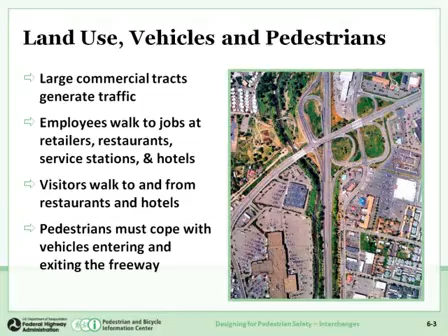Land use today has evolved significantly since World War II. We do not have the compact urban centers that we once had at the time of World War I and before. Typically, along a freeway, a typical city has just a few freeway interchanges. And the freeway itself becomes a barrier to pedestrian movements.

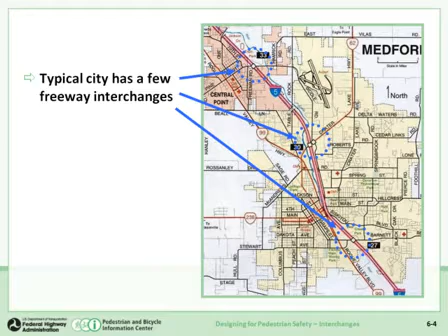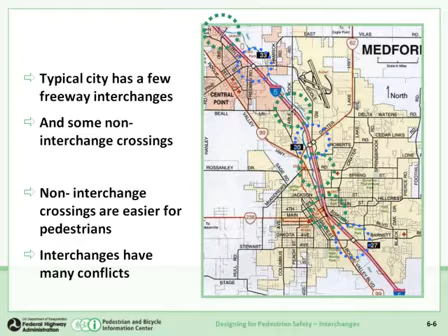We have some crossings that are not interchanges. These are preferable from a pedestrian's point of view because they don't have the ramps. We have non-interchange crossings that are easier for pedestrians. It's the interchanges that have the conflicts.

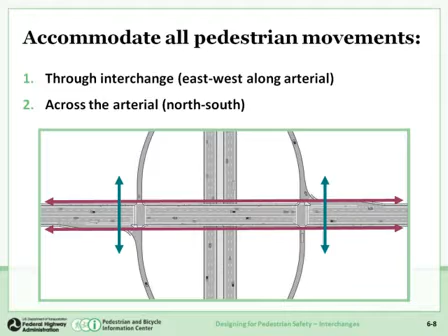And sometimes, and not all that uncommon, we need to be able to get pedestrians across the arterial near the freeway ramps. And usually there are added turning lanes, either exiting decel lanes or accel lanes, that add further width and make it more difficult in terms of the distance crossed for a pedestrian.

The interior crosswalks at an interchange, those that are between the ramps on the conventional roadway, typically are closed. The crosswalks that are on the outside of these ramp intersections typically are the ones that need to be open. And yet, even with islands and other good measures and tight radii, this is not a favorable, conducive, walkable environment. This is one that's got a higher level of difficulty to it for a pedestrian.

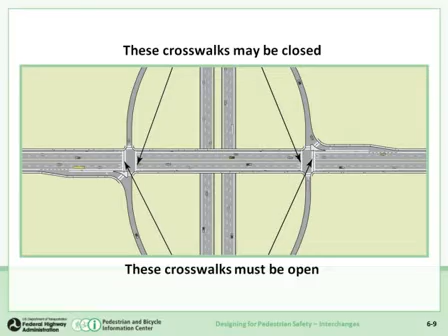Typical interchanges can be big with large turning radii. The key, the best practice to accommodate pedestrians, is to bring the speed environment of the turning movements at these ramp termini with the conventional roadway down to a pedestrian level, a context that we'll characterize as lower speed. And one of the outcomes of that is the interchange then begins to look like an intersection.

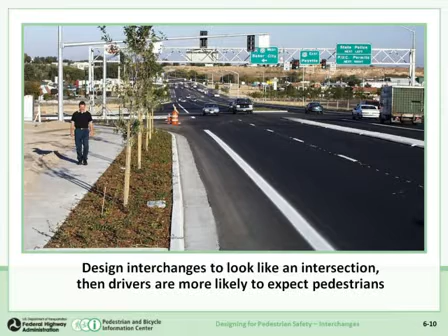And it's an intersection where drivers would expect pedestrians, at a busy intersection like in the photo that you have in this slide. Radii are kept reasonably small to restrict the speed of turning traffic and hence make it workable for pedestrians. Consider each ramp terminus as half of an urban intersection and plan and design it within that context.

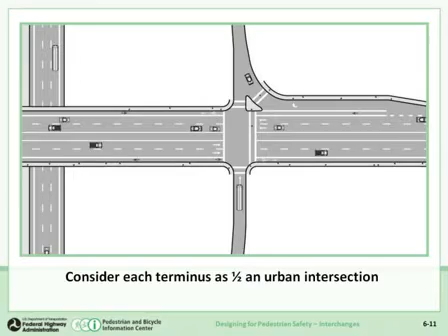Islands are the engineer's best tool for busy intersections with lots of lanes to reduce the crossing distance exposure for a pedestrian, to greatly reduce the time they're in the street and the distance.

What you wish to avoid are the large radii, such as the intersection to the right. This is a real-world photo from North Carolina of an intersection that was developed as a rural interchange with a high-speed sweeping right turn lane. Avoid a free flow movement. How do pedestrians get across it, as shown with the purple arrow here?

It's a context that's high speed. A large radius means high speed, and this is not a context that we want to be able to cross pedestrians in. The best practice is a tight radius: restrict speeds, keep them to a slow environment, and facilitate the movements of the pedestrians.

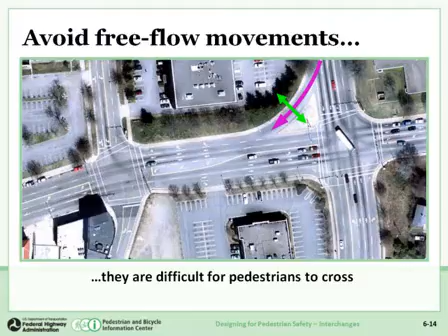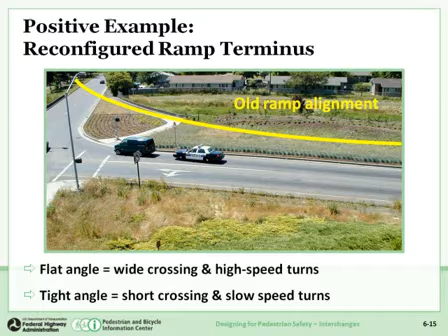The older ramp alignment is shown in yellow, and you can see how the new ramp alignment, which is tighter, has been brought in, and you can see where the sidewalk is turned in this photo from Oregon to the crosswalk. Why was this done? To facilitate, in an appropriate manner within the appropriate context, a pedestrian-friendly environment, one that works for them even though it involves high-speed exiting traffic from the freeway.

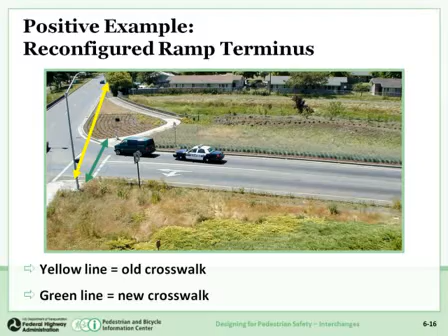The yellow line is where the old crosswalk was, and look at the length of that. The short new crosswalk is shown by the green arrows, and that is a significantly smaller distance, less exposure in the street, and the speeds of the turning traffic exiting the ramp will be much smaller.

Where free flow ramps are used, that's the least desirable; crosswalks should be placed where they're visible. The existing crosswalk had been up on the ramp itself, where it's very hard for an approaching driver on the crossroad to see. The crosswalk could be here, as shown with the yellow arrow, and that location is better seen by the approaching driver, and being seen as a pedestrian is very important.

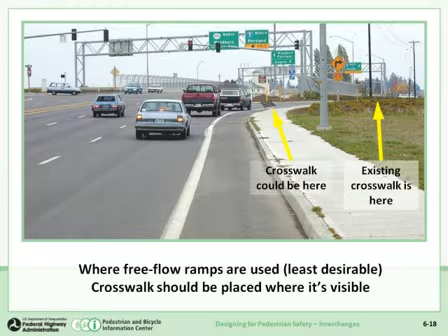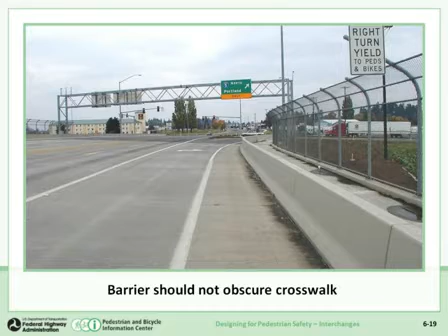Barrier, particularly the raised Jersey barrier, and particularly a problem with the single-point urban interchanges, can obscure the crosswalk. Be very careful of sight lines and what a driver can see and where. This is a check that should be done in terms of the availability of sight of the crosswalk for each urban interchange.

Choosing the best crosswalk location sometimes is not clear, and you need to make it what's most logical to the driver or to the pedestrian. You have three choices: the most direct route, and that's usually on the direct accessible path; the shortest crosswalk, which rarely tends physically to be the most direct route; and then there's the compromise somewhere in between to attain visibility of the pedestrian in the crosswalk and still be not the shortest, but at least shorter than the one that would be on the most direct route.

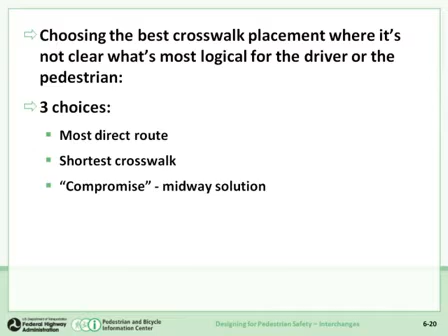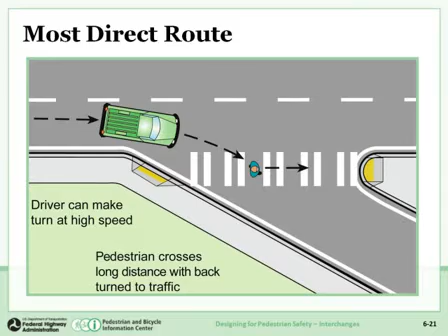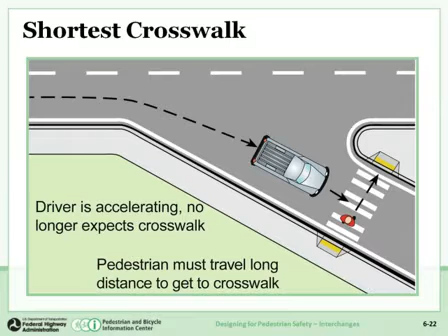The most direct route always ends up with a longer crosswalk. Unfortunately, the driver can make a turn like this at high speed, and the pedestrian's out in the crosswalk area for a long time and distance with his back turned to traffic. If you shorten up the crosswalk so it's straight across, the driver cannot see the pedestrian in the crosswalk and the sight line on the approach, and they turn onto the ramp and accelerate, and there's the pedestrian confronting them. Even though this is the shortest crosswalk, it's not the best.

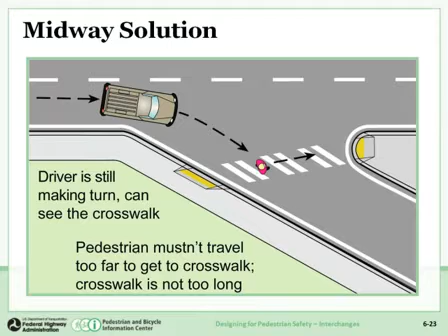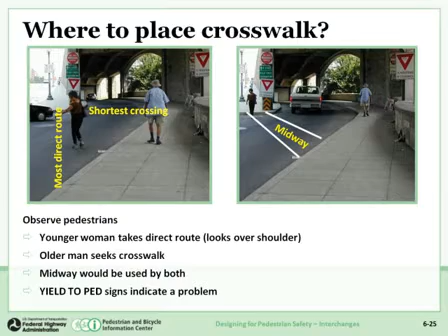So midway could be used by both a younger person or an older person as a choice. And midway in between seems to work the best. And that is what we, FHWA, are recommending as the best practice. And it's given the best results in the field.

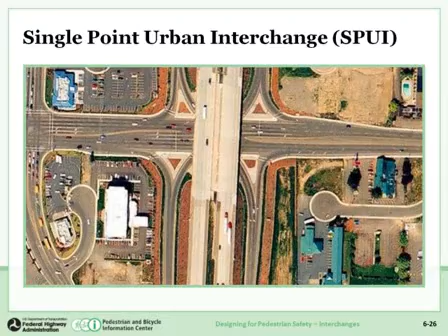The single-point urban interchange, or SPUI, presents several problems, particularly the SPUI that's under, and this is a photo of a freeway going over a single point that goes under below. When you look at all of the locations where a pedestrian has to cross, there's many, and that's the problem. We know that a single point takes less right-of-way than a split diamond or a tight diamond. Also, as a result, it is always seen as advantageous in terms of cost of land.

Also, with a SPUI, we only have 3 phases that we need for the signal control. We have 3 movements. They're all run through one cabinet, one controller, one set of signals. We first have the through movements on the crossroad. Then we have the left turns in one direction. Then we have the left turns in the other direction. With having only 3 phases as opposed to a tight diamond with 6 phases, we have less yellow and red time, less lost time as it's spoken, and more efficiency.

We have longer clearance distances with a single point, and we have a lot of ramps. In fact, each of the crosswalks that go from left to right have to cross 1, 2, 3, 4 on and off ramps in total in order to continue along their path along the arterial.

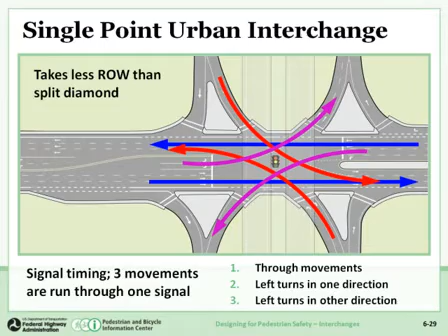So how to make a SPUI work for pedestrians? Provide continuous sidewalks on both sides. Break up the crossing into several small steps, and it's done naturally in a SPUI design with the geometrics to provide the large turning islands. These are not small. We want, with these islands, to still keep tight, essentially right angle turning movements.

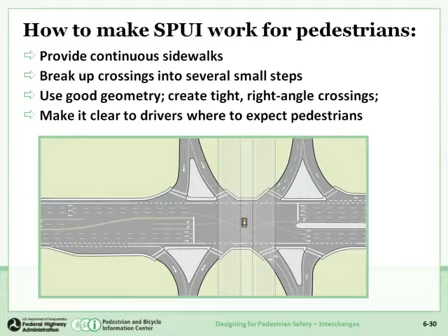Make it clear to drivers where to expect pedestrians by where we place the crosswalk, in clear visibility of the driver approaching the on-ramp. So 1, our pedestrian walks along a well-defined right turn lane, crosses at point 2 to the island, crosses the on-ramp. 3, peds proceed across the island, along the sidewalk on the island. 4, then we cross the other on-ramp from the left turn, and that's signal controlled.

Then our ped proceeds on the sidewalk under or over the bridge to the next set of ramps for the other side of the freeway, and cross the exit lane, signal controlled typically with a SPUI, cross the island, and then 8 across the last of the exit ramps, typically stop controlled. So we've broken up this sequential movement into 8 separate movements with appropriate pedestrian facilities and control for each of them.

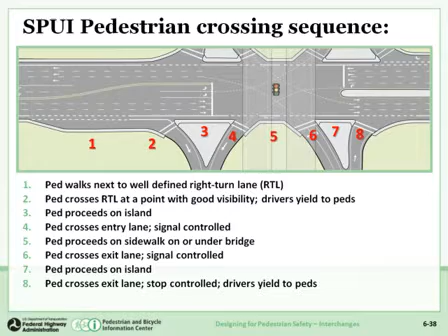So aerial view looks like this. Our pedestrians are walking from left to right. They've come up from the left on the south side of our conventional roadway for this SPUI that's under, crossed the on-ramp from the right turn lane to the island, and now cross to under the freeway, cross the off-ramp, signal controlled, then cross the second island and the yield controlled or stop controlled right turn lane, and on along the sidewalk.

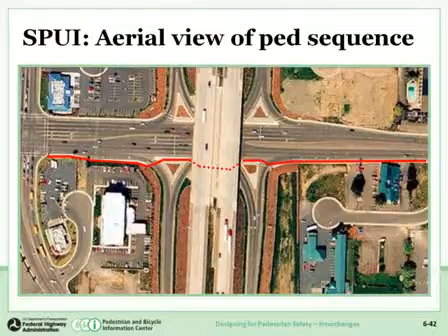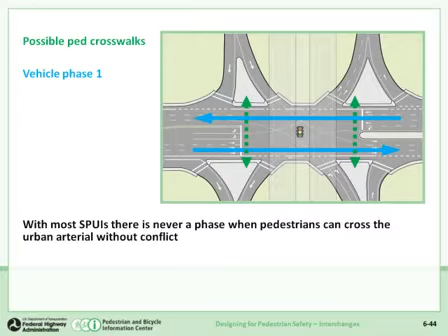With most SPUIs, there's never a phase where pedestrians can cross the urban arterial itself within the SPUI intersection. And you need to understand that if for some reason you do need to provide pedestrian crosswalks, they can be done, but you're going to have to accommodate it in the signal cycle and in the sequence. The problem is vehicle phase 1 conflicts with these pedestrian movements across the arterial at the SPUI. So does vehicle phase 2 of the 3 phases, and also vehicle phase 3.

Solution number 1 is to do a 2-step crossing, and that's where you would cross from the island to a refuge island in the middle, where they divide the 2 opposing directions of traffic, or cross the pedestrians nearby but not at the SPUI, at the adjacent signals or at a signalized pedestrian crossing away from the SPUI.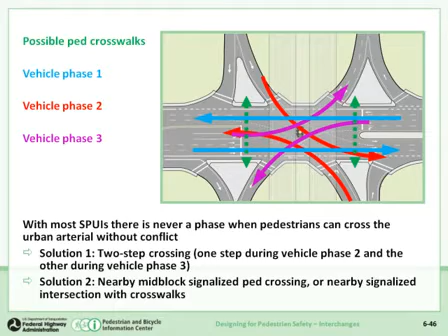So let's recap. Why is controlling land use important? Why do pedestrian crashes occur at freeway interchanges, and what kind of movements should be avoided? And how can one mitigate for these problems? Well, land use is important because you have high cost, high density, high commercial value land. And those types of land uses generate pedestrian traffic. It's expected, it's a natural outcome, and you need to plan for it and make sure it works.

Many of the employees, particularly of service sites such as large auto dealers, hotels, restaurants, walking is part of their transportation trip along with other forms of transit, and it may not be by auto at all. So provision of pedestrian facilities is crucial to get these people to work and from work safely using their mode, which is public transportation and walking.

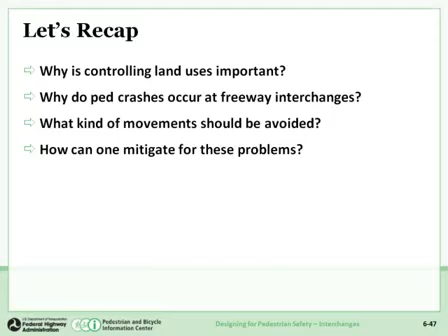The issue with pedestrian safety at interchanges is that drivers don't expect them. Drivers are exiting or entering the freeway, which is a high-speed environment, and they just don't expect pedestrians in the high-speed environment. So what kind of movement should be avoided? Free-flow movements on the ramps, anything with high speed. The best geometric design techniques keep turning lane geometry tight and stay in a low-speed context so we can provide for pedestrians. And we mitigate them with the measures I just covered.

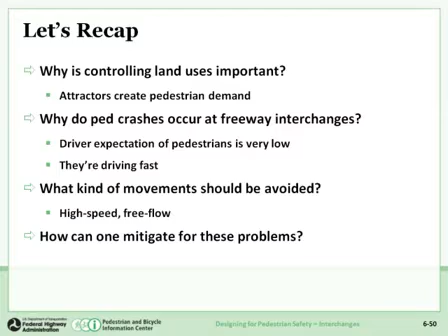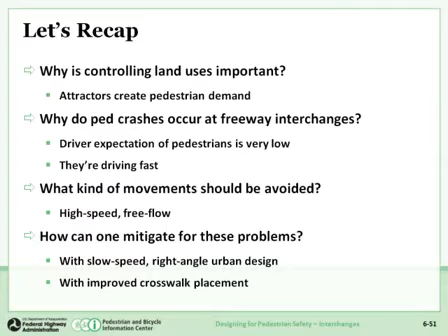So attractors create pedestrian demand. Drivers' expectations of pedestrians is low at ramp termini, and they're going very fast, exiting and entering the freeway. Avoid the high-speed, free-flow turning movements. Reconstruction or initial construction of tighter radii will create a low-speed context appropriate for providing for pedestrians. So how can one mitigate? With low speed, right-angle urban design, improved crosswalk placement. These techniques are proven. These techniques work, and FHWA is promoting these as the best practice to meet the pedestrians in the environment of freeway interchanges.

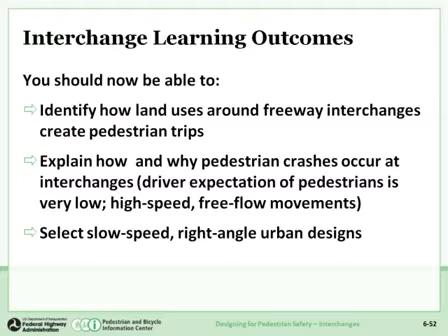So in our learning outcomes, you should be able now to identify and understand how the higher type developed land uses around a freeway interchange create pedestrian trips, and if we have pedestrians, we need to provide for them. Explain how and why pedestrian crashes occur at interchanges. Well, it's a high speed. Did I mention high speed? It's a high speed and often a free flow context, and it's one where drivers are not looking for pedestrians as they would at an urban, tight, compact intersection in a higher density area. The best solution is to stay within the pedestrian context of low speed, tight turning radii in the geometrics.

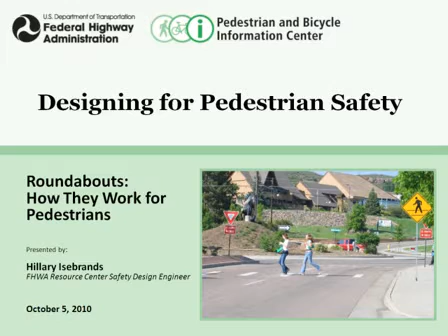So with that, I'm going to go ahead and spend some time talking to you about roundabouts. Roundabouts is an area that for the past 7 years I have done quite a bit of research on, and hopefully you'll find this information useful. Roundabouts are new and exciting. Some states are much farther ahead than others when it comes to roundabouts, but a common concern that we hear all over the U.S. is how do they work for pedestrians, and how can we make sure that pedestrians are just as safe at roundabouts as we're finding that motor vehicles are.

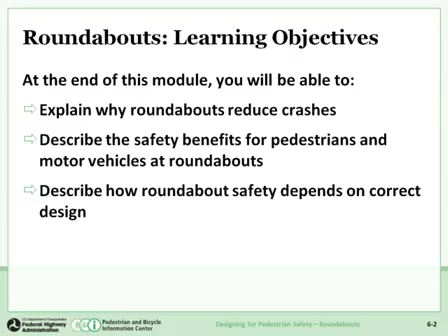So with that, the learning objectives of this portion of the webinar today are explaining why roundabouts reduce crashes and describing their safety benefits for pedestrians as well as motor vehicles, and then describing how the safety does depend on good design and good geometrics. Always important to have a good design on the ground, promoting the best safety for motor vehicles as well as for pedestrians and bicyclists.

So quickly, just going to talk a little bit about what a modern roundabout is. It is a circular intersection. There are other circular intersections that you might be familiar with, large rotaries. Also neighborhood traffic calming circles. But these are all circular intersections. But what's important to understand is that not all circular intersections are roundabouts. Roundabouts do have their own specific design characteristics, and we'll go ahead and talk a little bit about that.

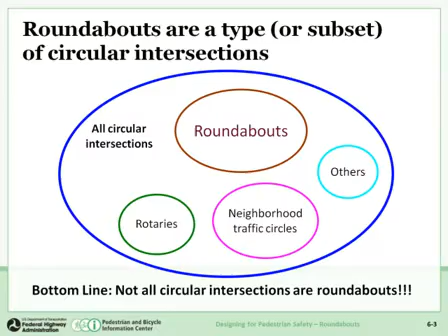But first off, we're going to look at what are some of these features of a modern roundabout that make it special and not a traffic circle and not a neighborhood traffic calming circle. So there's the separated sidewalks that direct the peds. Pedestrians do not cross to the center island. There's a splitter island that acts as a refuge as pedestrians cross one direction of traffic at a time.

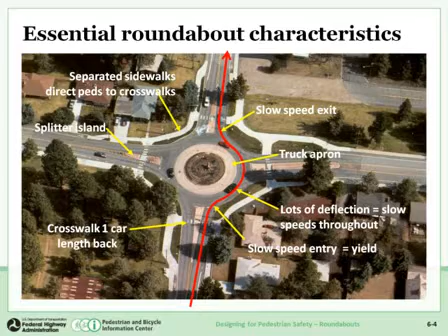Typically, the pedestrian crosswalk is approximately 1 car length back from the yield line, and also the deflection of the entry, as well as the curvature of the roundabout itself, really forces traffic to be traveling anywhere probably from 15 to 20 miles an hour. So you've got slow speeds on all of your approaches. All of your traffic is going at a fairly uniform speed, which is a safety benefit to all users of the roadway and intersection.

So that gives you an idea of some of the features of a modern roundabout, but let's quickly go back and talk about what you may be more familiar with, which might be the New England-style rotary, where we typically have a large diameter, and these large diameters can create high speeds.

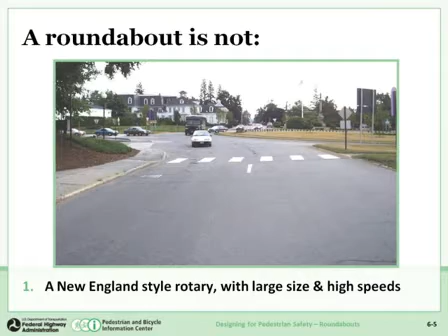So a modern roundabout is not a New England-style rotary. Here's an example; you see the large diameter. This was an old rotary, over 600 feet. There's no control on the entry, so the vehicles approaching the intersection are not yielding to the people that are driving in the circulating roadway. And so there's high speeds and weaving areas. So that's typically what you would find with a large rotary.

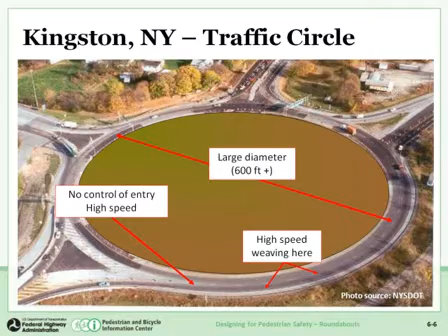Now, in comparison, look at the difference between a modern roundabout, which in this case we were saying is typically 120 to 250 feet. They can be larger, they can be smaller, but look at the huge difference between what the old style rotaries look like and what that new modern roundabout looks like. It's quite substantial, and you can see that the design exhibits slower speeds for the motorist. You can also see there is a bypass lane that was created for this particular roundabout that's fairly unique, I guess, to this particular case based on traffic volumes. But again, you can see the curvature of the approach, the deflection that would constitute slower speeds.

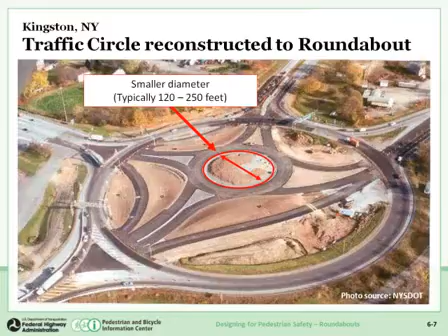Again, a roundabout is not what we find in Washington, D.C. Many of those old circles in the Washington, D.C. area actually have the green, yellow, red traffic signals that do control the vehicles coming in and out of the circle. You can also see that there's access to the center island. Again, not a characteristic of a modern roundabout, but what you would find at these DC-style circles, and I say DC just as an example.

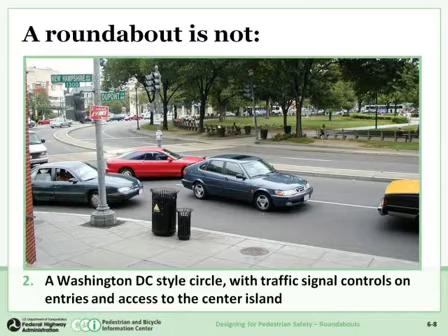Also, it's not a traffic calming circle. This is one that you often find in neighborhoods, done, again, to slow traffic down. They are constructed within the right-of-way, and again, it's not to be confused with mini roundabouts that do have the features and characteristics of the modern roundabout. In this case, there is no deflection on the approaches, and oftentimes you would find a stop sign at one or more of the approaches on a neighborhood traffic calming circle. So similar in nature, but again, not what we would constitute as a modern roundabout.

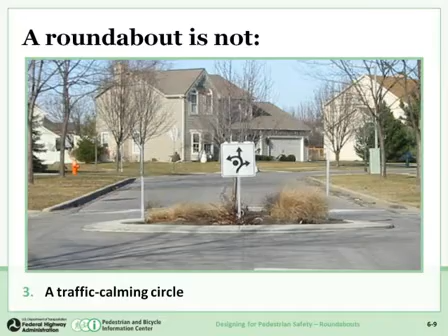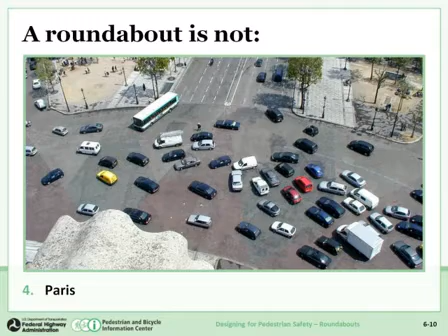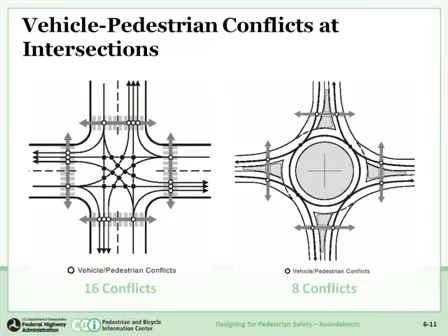Why roundabouts are safer. I've alluded to this previously, but let's talk in a little more detail. Slow speeds for all traffic; it's a key element to the safety benefits of a modern roundabout. Reduced conflicts: as we just saw, the number of conflict points is reduced. In addition, the conflict points are changed. You've got different types of conflicts. At a roundabout, we don't see T-bone crashes anymore. So we're changing the characteristics and the types of crashes that might be occurring at an intersection when a roundabout is in place compared to a stop-controlled or a signalized intersection.

And again, I mentioned another of the characteristics was the yield on entry. All vehicles approaching that circular roadway are yielding to the traffic within the circulatory roadway. Of course, if there's not a vehicle within the circulatory roadway, they can proceed through the intersection, and take an acceptable gap if there is a vehicle in the roadway.

Looking at crash reduction factors, in the U.S., there's NCHRP Report 572, which is the most comprehensive study that we have here in the U.S. regarding roundabouts. It saw the benefits of about a 54% reduction in total crashes, a 76% reduction in fatal and serious injury crashes, and it did find a 27% reduction in pedestrian crashes. Now, most of the research that has been done thus far in the U.S.

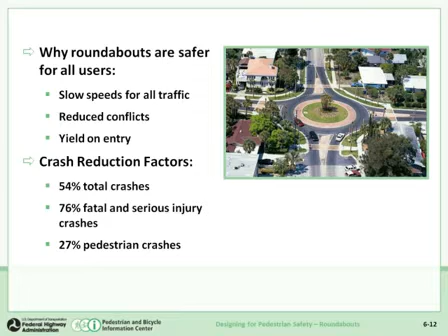However, again, going back to why roundabouts are safer, looking at the slower speeds, the reduced conflict points, yield on entry, and some other pedestrian characteristics that we're going to look at in just a minute, you can see that we do feel that there are great benefits for roundabouts for pedestrians, whether it's a single-lane roundabout or a multi-lane roundabout. But it's hard to put numbers as far as a crash reduction factor to this point, specifically with multi-lane roundabouts.

So pedestrian movements at a roundabout, again, pretty straightforward. The person crossing here from the right of the screen to the left of the screen would look for traffic coming towards that individual. When he sees an acceptable gap, he crosses to the splitter island. Again, you're only crossing one direction at a time. The crossing distance is shorter. The pedestrian might find refuge within the splitter island before then finding an acceptable gap to cross the exit side of that approach.

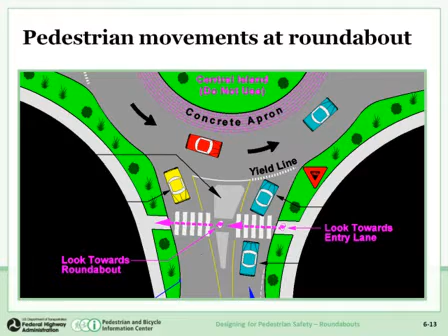Advantages for pedestrians: they're crossing only one direction at a time, which again is critical as far as choosing a gap and not looking both directions at the same time, as we sometimes have to at other types of controlled intersections, signals, and stop controlled. Splitter island, again, provides refuge, shortens the travel distance, and then reduced vehicle speeds. Again, I'm repeating this because it's so critical. These are the elements that really provide a safe environment for pedestrians at roundabouts.

And the photos that you see in this particular slide, we do find roundabouts very commonly near schools, near school campuses, all over the U.S. There are probably upwards of 50 to 100 roundabouts, I would say, near or at schools or intersections adjacent to schools. And then the two photos on the right, I just want to point out this is actually an example of a road diet that included a roundabout at one of the intersections.

You can see the number of crossings there. We've got 1, 2, 3, 4, 5, 6. There's about 6 lanes of crossing at that intersection before. This is Asheville, North Carolina. They didn't need all those lanes for capacity. Using their turning movements and the traffic volumes that they had, they were able to narrow up, give that corridor a road diet, and they created a much safer environment.

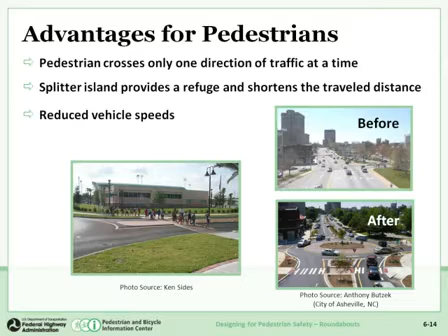They were able to add bike lanes on that corridor. They were able to add additionally some landscaping features. And again, look at the difference in crossing, the before, if you were a pedestrian crossing that intersection, and the after, and the huge change in the environment you've created for that pedestrian by changing that design on that particular corridor. All right, so let's just step through a few slides on the crossings at a roundabout again.

Narrow entry slows drivers. That's something that is, again, beneficial. Not only the narrow entry here, in this case for a roundabout, but also the geometric design. The design is changing how the driver drives through that intersection. And again, all drivers are typically driving very similar speeds, which is a big advantage.

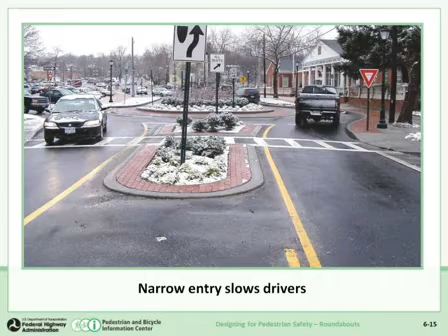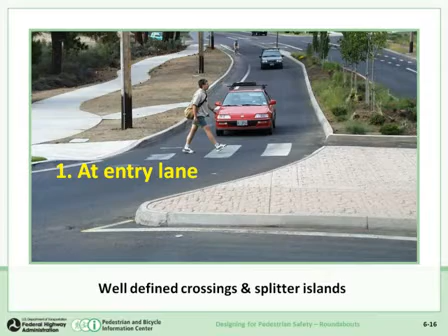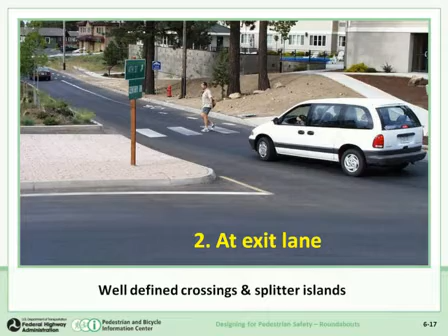A person's, again, crossing the entry lane here. The person looked, the driver stopped. The person crossed the street to the splitter island. And then again, you can see this particular person's coming across an exit. The person is yielding to the pedestrian. The person here is coming out of the roundabout and driving out. But the pedestrian took the gap and crossed safely.

When we talk about multi-lane roundabouts, again, I mentioned our data that we have as far as the safety is a little bit less robust at this point in time, partly because of the data that was collected, there weren't a whole lot of multi-lane roundabouts on the ground. But again, reiterating the characteristics of a roundabout, you can see that it does create a safe environment.

But we do have to be cognizant of the multiple threat, potential 2 vehicles coming at a 2-lane exit, and one vehicle might be blocking the vision of the pedestrian crossing. So again, with additional conflicts with additional lanes and potential higher speeds at multi-lane roundabouts. And when I say higher speeds, we're talking about 5 miles per hour.

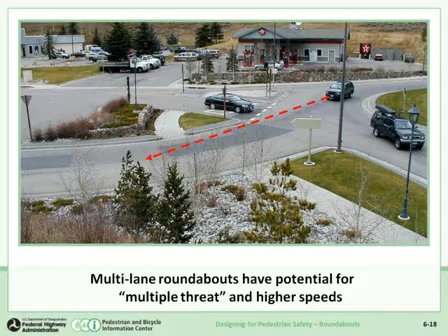Higher, so we might be talking 20 to 25 miles an hour instead of the 15 to 20 miles an hour for a single-lane roundabout. But again, that's in that lower threshold for speeds of vehicles versus at a stop-controlled or a signalized intersection, we might have one direction of traffic going 35, 40, 45 miles an hour. And the chances of a fatality if a vehicle hits a pedestrian at those speeds is exponentially higher than at the lower speed range of 15 to 20 miles per hour.

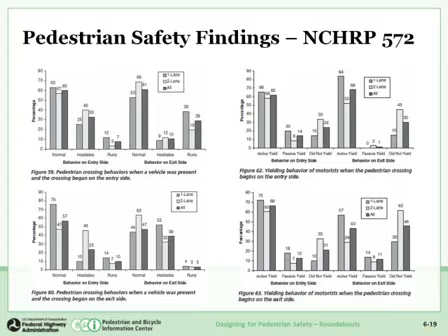I'm not going to go through this slide in detail. However, I did want to point out, I mentioned the NCHRP 572 report that's applying roundabouts in the United States, that study, and there is some data within this report that I encourage you all to check out. It looks at pedestrian crossing behaviors when a vehicle was present and the behavior of the pedestrian. It also looks at the yield behavior of the vehicles. So this can provide you some information on what's out there as far as the U.S. and the data. And I'll leave that to you to dig a little deeper with NCHRP 572 and the findings of that particular study.

A lot of you might be interested in what kind of an environment roundabouts create for sight-impaired pedestrians. Circulating traffic potentially can mask the sound of entering and exiting vehicles, and quiet cars can also increase the ambiguity and uncertainty for that pedestrian that's trying to cross. Also, it's potentially increasing time for non-visual gap selection, keeping in mind someone's either blind or sight impaired. So increasing time for non-visual gap selection and confirmation can limit opportunities to cross. So you can imagine the folks that are sight impaired and blind, how they might tackle crossing the street without those visual cues that many of us can rely on.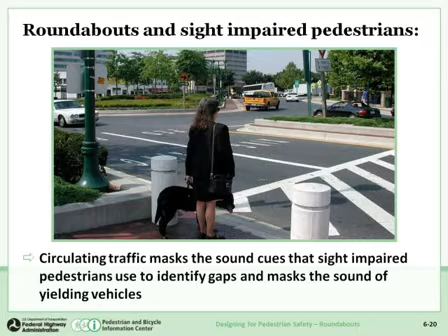And I will also point out that the U.S. Access Board does have the PROWAG, the proposed right-of-way accessibility guidelines, and those are in draft form still at this point. I can get into more details if folks have questions later, but they are proposing that at roundabouts with multi-lane crossings, a pedestrian-activated signal shall be provided at each multi-lane segment of a roundabout. So if you've got a multi-lane approach, you would need to provide a pedestrian-activated signal that would comply with 306, which is looking at accessible pedestrian signals. And if people have questions, I can try to answer some of those a little bit later, but I do encourage you to check that out as well on the U.S. Access Board website if you're interested in that component.

As far as lighting goes, many of you may have been on some of the other webinars that we've conducted regarding pedestrian safety offered through PBIC, and I just wanted to give you an idea of some of the lighting design and how that affects calling attention to the drivers, calling attention to the crosswalks at roundabouts. This example is roundabouts, but as we know, it's very important to have lighting over crosswalks at any intersection or at any crossing. This gives an example of center-mounted lighting, and you can see there the 400 high-pressure sodium, 28 lux, and what that looks like to the driver, the pedestrian in the crosswalk.

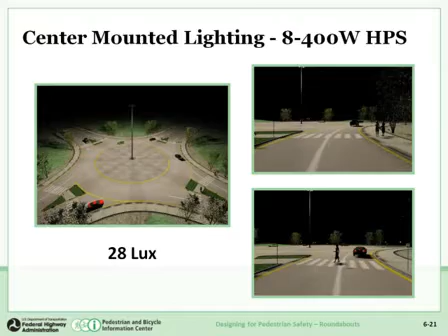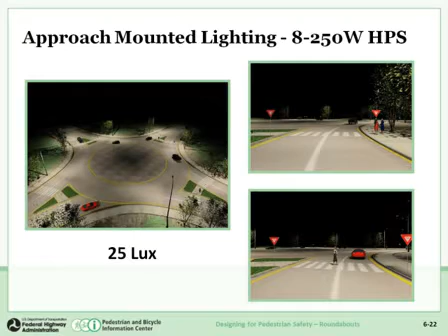And here's another example. Approach-mounted lighting. This is on the approaches on the radius of the roundabout, and you can see the difference in how that person in the crosswalk, when the lighting is provided in a different location, what a difference it can make. I'm going to go back one so you can see it. There's the center-mounted lighting, 400 high-pressure sodium, 28 lux, and then here is the approach-mounted lighting, 250 high-pressure sodium, 25 lux, and you can just see the difference. So the position and the design of your lighting can make a very big difference in the visibility of the pedestrians in the crosswalks. This is an example for a roundabout, but it also applies at other intersections, considering the location of the lighting and how important it is.

I'm also going to share with you a study, NCHRP 3-78A, that has not been published yet, but it was looking at accessibility of pedestrians at multi-lane roundabouts and free right turns as well. I don't have the exact title correct for the 3-78A project, but the roundabout that was studied was in Golden, Colorado, and there were two different types of treatments, I should say, looking at pedestrian accessibility.

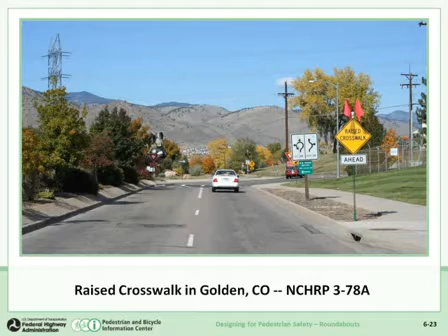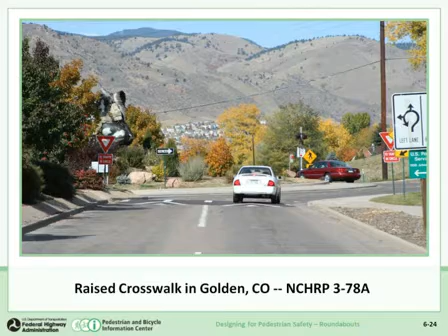And again, related to this particular study, the U.S. Access Board was involved, Federal Highways, and the Transportation Research Board. And so you should be looking for that shortly. But also I want to mention, and I don't have a slide on this, the rectangular rapid flash beacon is another treatment at crosswalks that has gotten some attention as a potential alternative at a multi-lane roundabout to provide accessibility for pedestrians. There are two locations in the U.S. right now that have the rectangular rapid flash beacon. Those are the warning signs that are ped-activated and have a stutter flash on them.

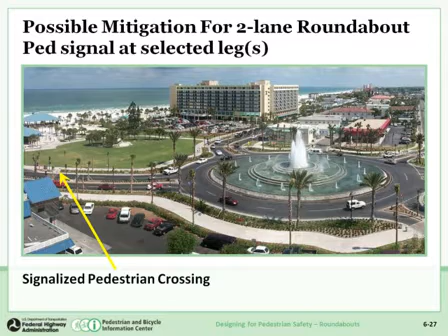You can see that big wide sidewalk skirting around the roundabout on what I'll call the south side, assuming north is looking up, although I probably don't have the directions quite right. But I think you can get the point, and here's an example. Again, this was a signal that was put in for pedestrians.

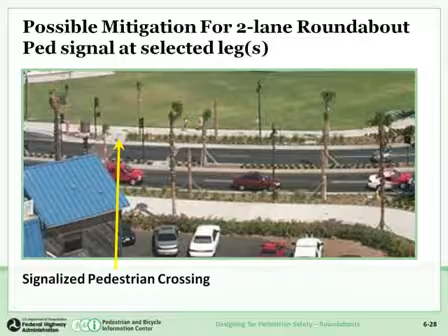Some of you might have traveled overseas in Europe and know that there are signals at roundabouts in, for example, the United Kingdom. More often than not, those are put in because the pedestrian volumes are so high that they need to regulate them, basically a pedestrian phase and a vehicle phase at those roundabouts, because otherwise the pedestrians kind of dominate the intersection. So again, this gives you some ideas of treatments at multi-lane roundabouts for handling pedestrians at high volumes as well as providing accessibility for pedestrians.

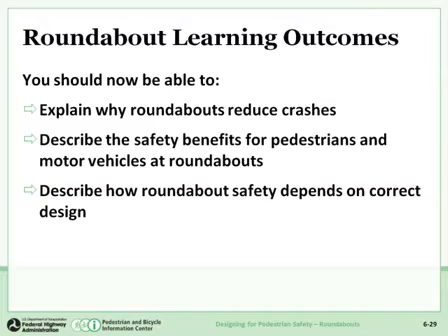For pedestrians, they're crossing one direction of traffic at a time. Traditionally, the crossing is much shorter than what you would find at a stop-controlled or signalized intersection, particularly if there are right and left turn lanes. And roundabout safety depends on correct design, of course: the deflection, getting those speeds down into that 15 to 20 mile per hour range, and changing the environment for that driver, with the ability to respect the roadway as well as respect the other road users.

So with that, we are going to go to a question and discussion portion of this webinar. I'm going to turn it over to Davian, but keep in mind the questions and discussion are open to not only what I presented here on roundabouts, but also what Fred presented on interchanges. So with that, Davian?